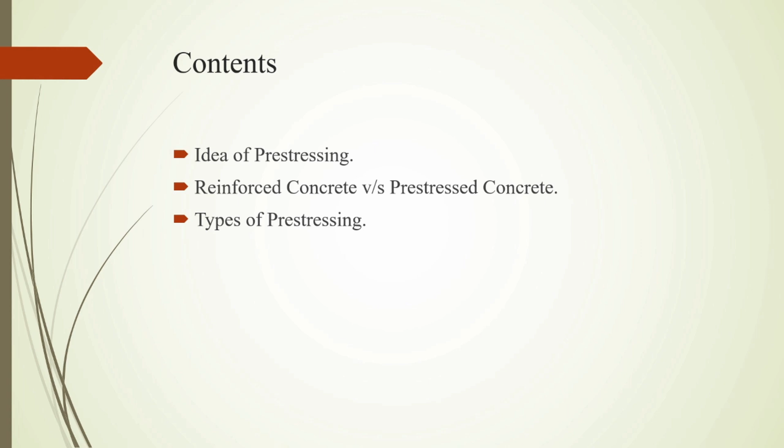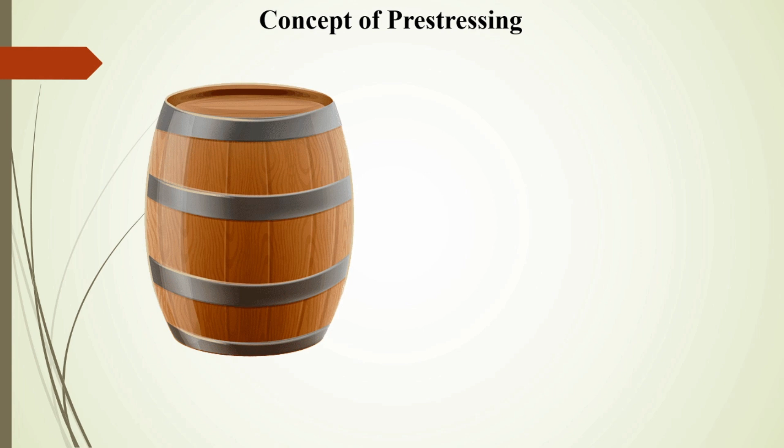Let us understand the concept of pre-stressing by taking a simple example. We know that in olden times and even now also, wooden barrels were used to store water or any other liquid. These wooden barrels always consist of metal bands tightly wound around the periphery as shown. Due to these tightly wound metal bands, a compressive pre-stress is developed along the wooden barrel.

So, when the water is poured inside the barrel, these compressive stresses counterbalance the tensile stresses which are developed due to the internal liquid pressure of water. So, what have we done here? We knew that the liquid inside the barrel will be producing tensile stresses. So, we have already given a compressive pre-stress to the wooden barrel so that it can resist the tensile stress easily. This is the whole idea behind pre-stressing.

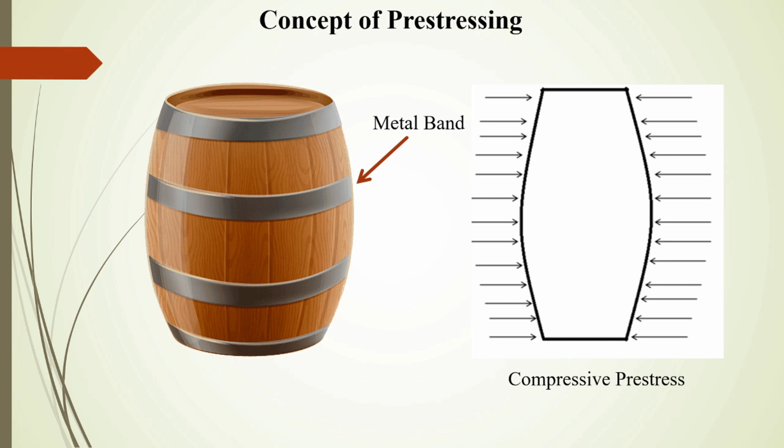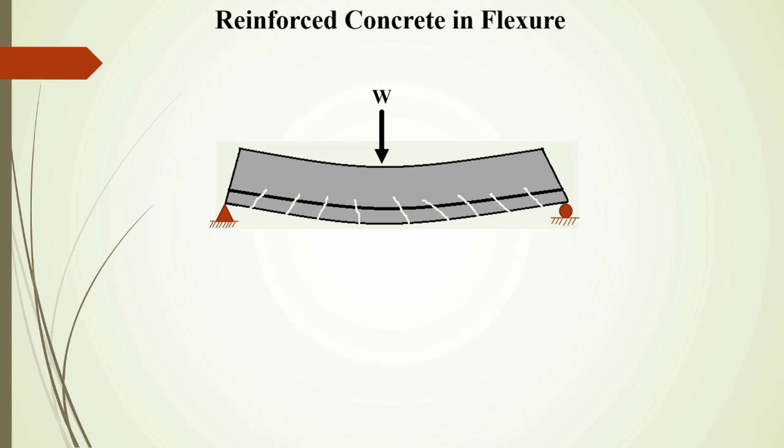Now, let us see how the idea of pre-stressing is beneficial to concrete. Imagine a simply supported reinforced concrete beam as shown. When transverse loading is applied to it, the beam bends, developing compressive stresses at the top and tensile stresses at the bottom. Due to this bending, cracks develop at the bottom and also the beam gets deflected downwards.

Now, consider a case of pre-stressed concrete beam. In this case, very high strength steel wires called tendons are tensioned or stretched to a desired extent. After the desired tension is reached, the tendons are cut, and when such highly tensioned wires are cut, you can just imagine how huge an amount of pre-stressing force is transferred to the concrete.

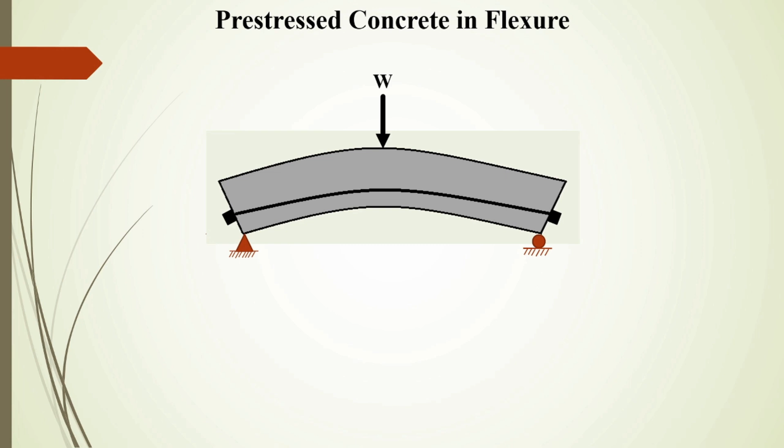Due to this pre-stressing force, the concrete deflects upwards, causing tensile stresses at the top and compressive stresses at the bottom. Now in this case, when the same loading is applied, the beam, instead of getting deflected downwards, returns back to its original horizontal position, and also it is free from any cracks, which increases its durability and serviceability. Hope the idea of pre-stressing is crystal clear to you.

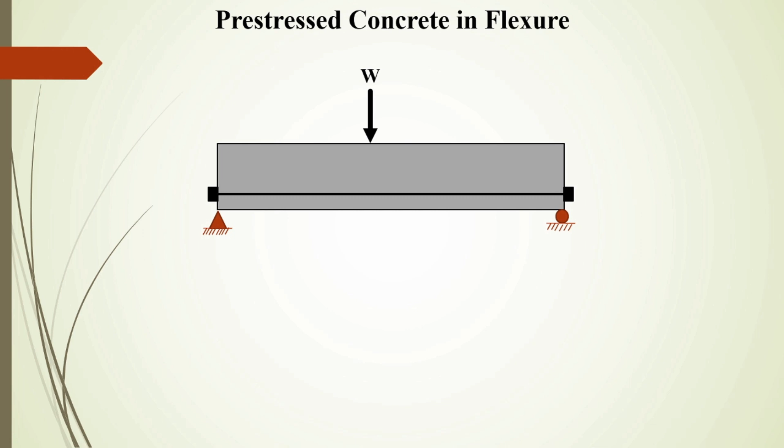Now, let us understand how we carry out the pre-stressing work at site. There are basically two methods of pre-stressing. They are first the pre-tensioning method and second the post-tensioning method. Now, let us understand them in detail.

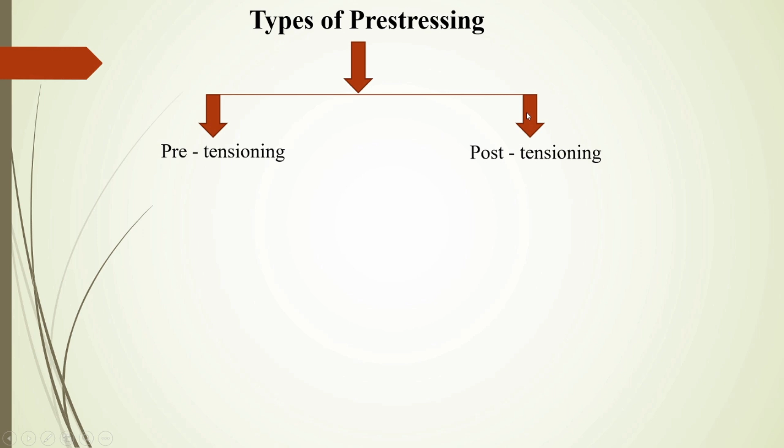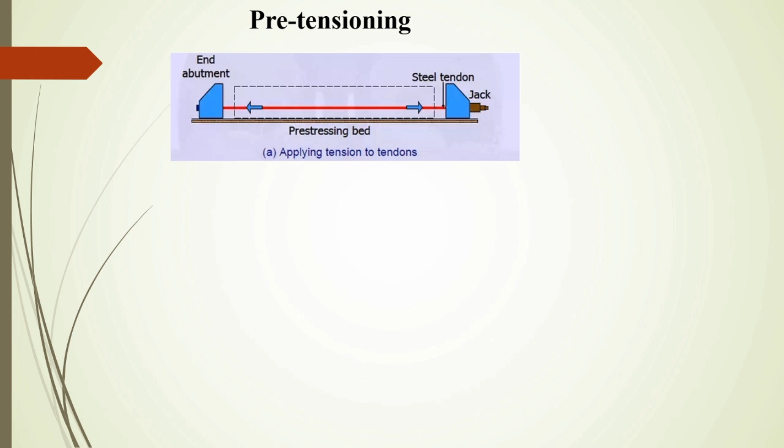As the name itself suggests, in the pre-tensioning system, the tendons are tensioned before the casting of concrete. That is, they are tensioned along with the formwork with the help of jacks. As we can see here, these are the tendons and they are tensioned before the casting of the concrete.

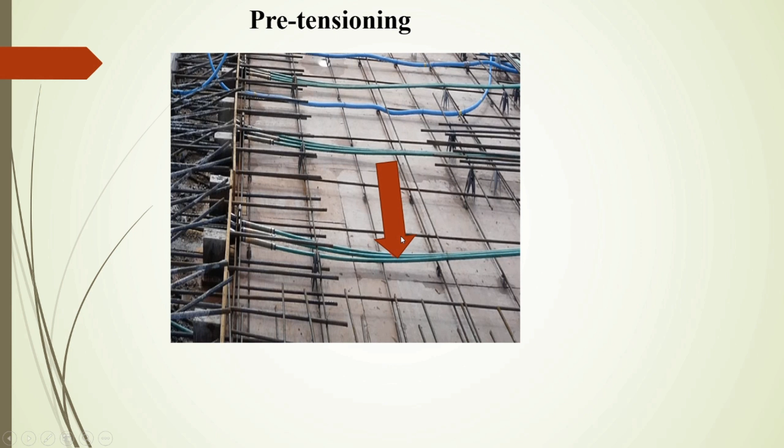After giving sufficient tension to the wires, the concrete is cast and allowed to cure till it reaches its desired strength. After the sufficient strength is reached, the tendons are cut so as to impart the compressive force to concrete. This was all about the pre-tensioning system.

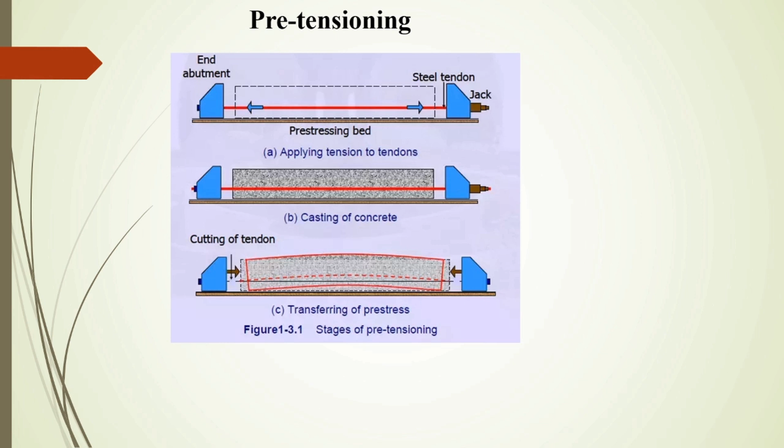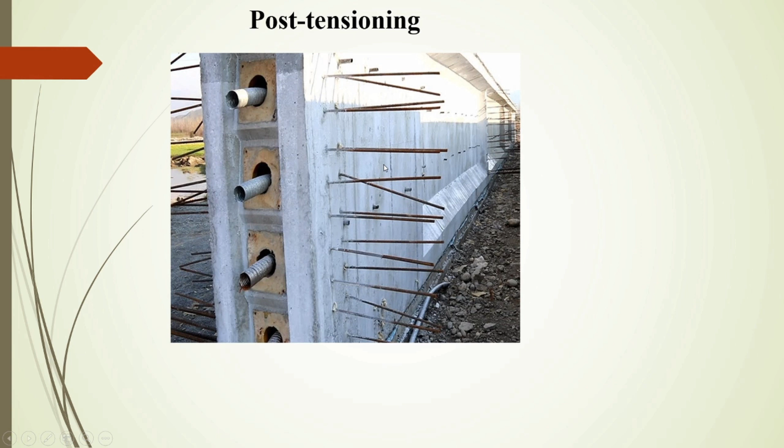After the member has achieved sufficient strength, the pre-stressing is applied at the site by jacking from one end or both the ends, and the ends are anchored as shown. The excess ends of the tendons are cut away and the duct is grouted and covered for rust prevention.

Hope this video clears your concepts about pre-stressed concrete. In the next video, we will be understanding the analysis of pre-stressed concrete beams using the stress concept.